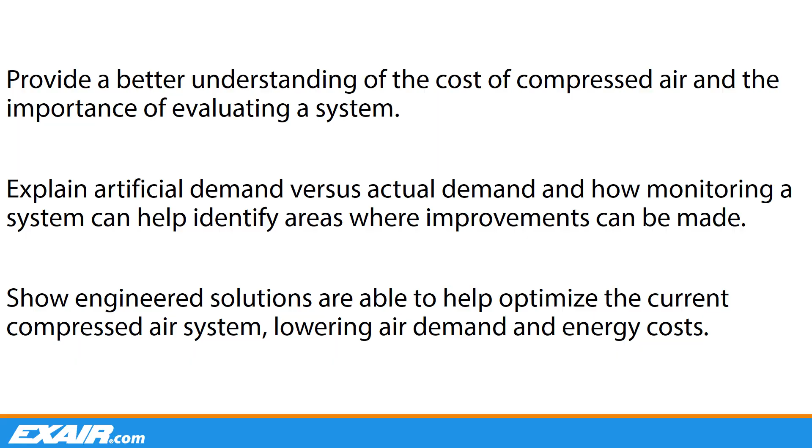From pneumatic hand tools like impact wrenches or nail guns to larger scale industrial applications like stamping presses, the use of compressed air can be found in almost any industry. It is often referred to as a fourth utility next to water, gas, and electric, and in many cases is the largest energy user in an industrial plant. The generation of compressed air accounts for approximately one third of all energy costs in an industrial facility, and up to 30% of that compressed air is wasted through inefficient operation and leaks.

In addition to simply wasting money, compressed air leaks can also contribute to a variety of other operating losses. A leak can cause a drop in system pressure, reducing the performance of end-use devices, which can have an adverse effect on production. A small leak may not be that noticeable, but several small leaks can lead to significant energy costs. With an average cost of 25 cents per 1,000 standard cubic feet, compressed air can be expensive to produce, so it is very important to use this utility as efficiently as possible.

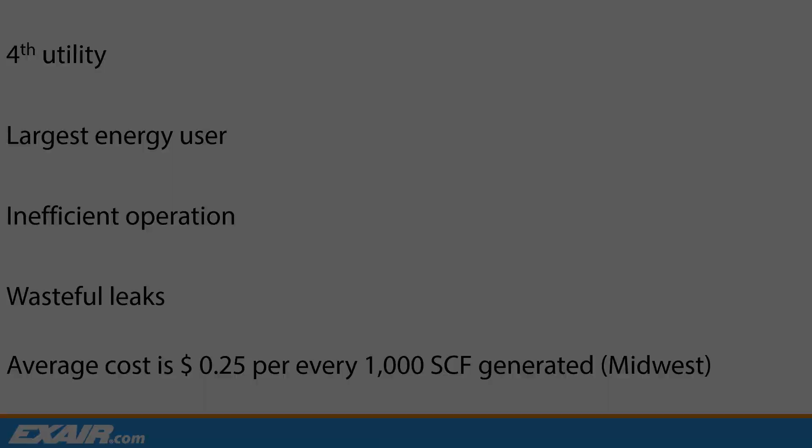Let's look at the cost of compressed air. Many plants know their energy cost, but if not, an industry average is 25 cents for every 1,000 standard cubic feet used. To get a better understanding of what this means, let's look at the following example. The cost will vary greatly across the country as utility rates change. If you know that your electricity rate is significantly higher than 8 cents per kilowatt hour, you should follow along with the slides and do your own calculation.

We start with a 20 horsepower compressor, which requires 15 kilowatts. At 8 cents per kilowatt hour, the 20 horsepower compressor costs $1.20 per hour to operate. If you have trouble calculating your usage, contact me or EXAIR after the webinar and we can run through the calculation.

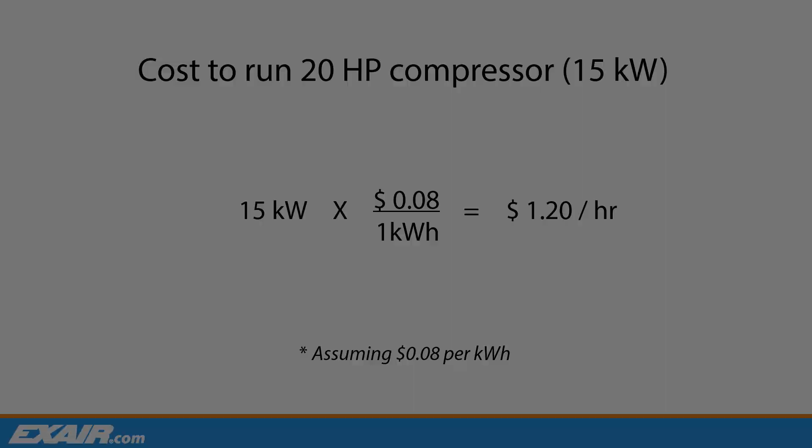A 20 horsepower compressor running at maximum output will produce 80 standard cubic feet per minute, or 4,800 standard cubic feet per hour. 4 SCFM per horsepower is a conservative rule of thumb. Some air compressors can make 5 or more SCFM per horsepower, but individual compressors and delivery rates may vary. To produce 1,000 SCF will take 0.2083 hours, or 12.5 minutes.

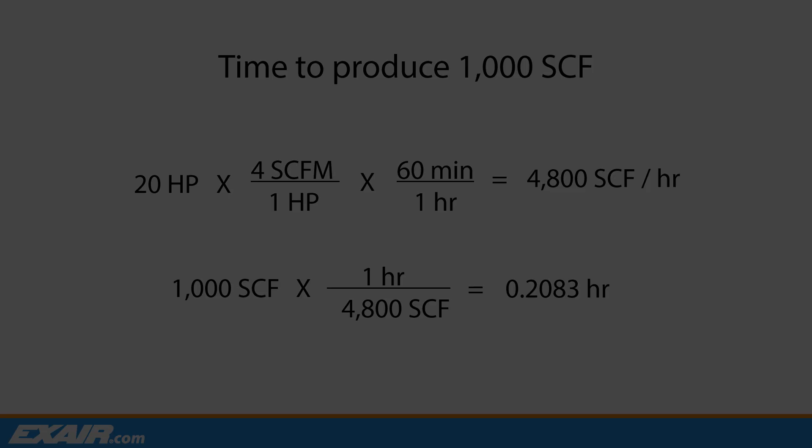Taking the cost of $1.20 per hour to run a 20 horsepower compressor times 0.2083 hours, the time it takes to produce 1,000 SCF, equals 25 cents for every 1,000 SCF generated. You will see this figure in most reference material as it's a very reasonable number in the Midwest, but is conservative in Europe and other parts of the country.

Let's talk about artificial demand. So what is it? According to the Compressed Air Challenge, it's the amount of excess air volume created by supplying higher than necessary line pressure for point-of-use compressed air applications. With fluctuating supply pressures, the artificial demand on the system varies, raising and lowering the amount of energy being lost to waste. A simpler explanation: plant personnel or operators increase the supply pressure in an effort to improve the end-use device's performance.

But when the pressure is maxed out and they can't increase it any higher, the line pressure will actually begin to drop, indicating potential leaks in the system. As a result, performance begins to deteriorate in certain areas. This not only puts stress on the existing compressor, now that it's having to operate longer, but it also leads to the false idea that a larger or secondary compressor is needed.

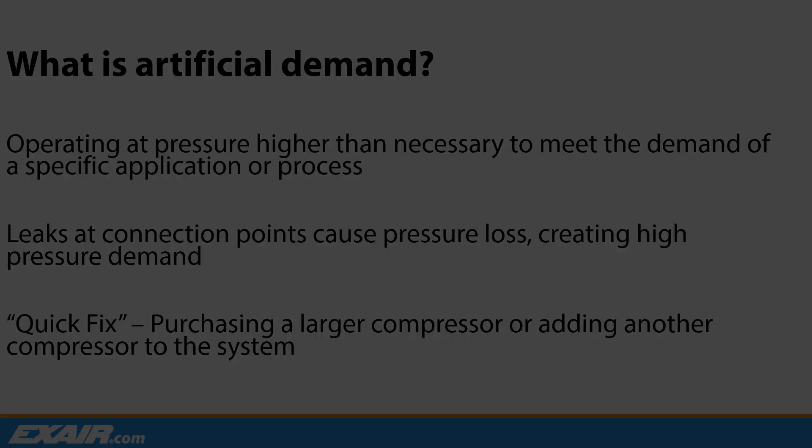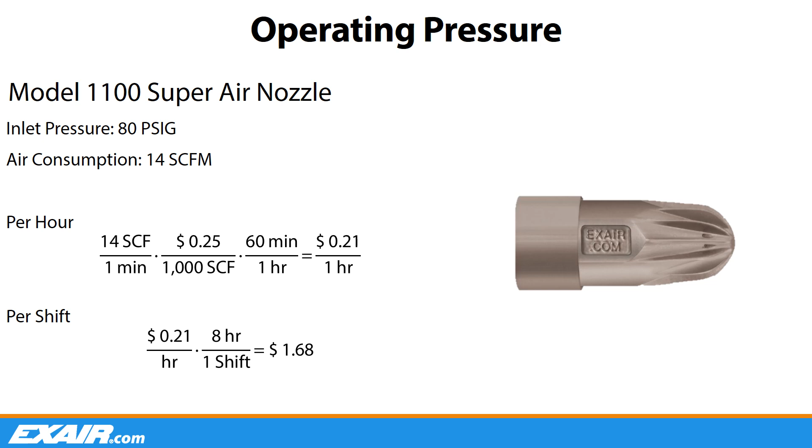Here's an example of how operating pressure can directly affect operating costs. We are showing our model 1100 Super Air Nozzle, which at 80 psig uses 14 standard cubic feet per minute. Based on the average operating cost of 25 cents per 1,000 SCF used, it would cost 21 cents per hour, or $1.68, to operate this nozzle for an 8-hour shift.

If we were to use the same model 1100 Super Air Nozzle but drop the operating pressure to 40 psig, the air demand would decrease to only 8.1 SCFM, reducing the hourly cost to 12 cents, or an 8-hour operating cost of 96 cents — a 72-cent reduction. This could lead to over $750 in savings annually.

Leaks in a compressed air system can waste thousands of dollars of electricity per year. In fact, in many plants, leakage can account for up to 30% of the total operational cost of the compressor. Some of the most common areas where you might find a leak would be at connection joints like valves, unions, couplings, fittings, etc. This not only wastes energy, but it can also cause the compressed air system to lose pressure, which reduces the end-use product's performance, like an air-operated actuator being unable to close a valve, for instance.

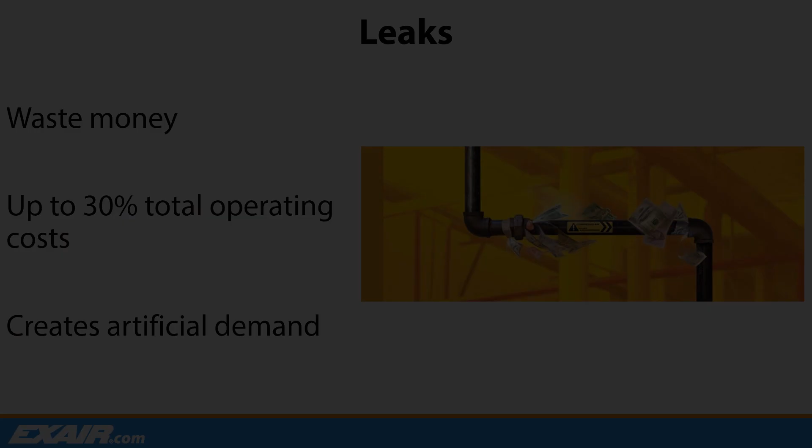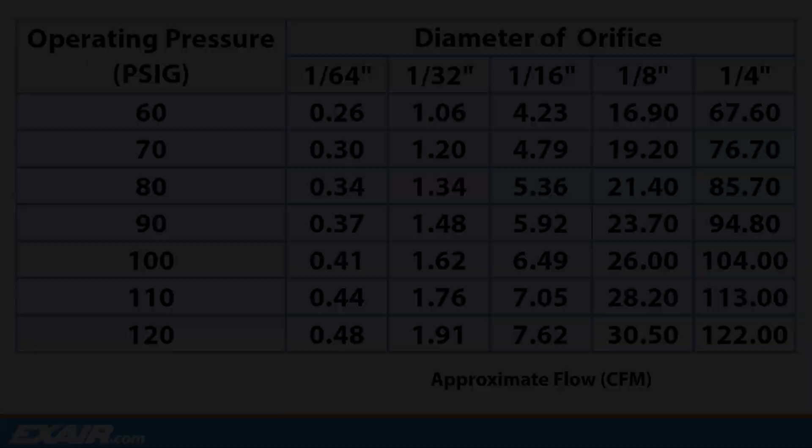One way to estimate how much leakage a system has is by using a downstream pressure gauge from a receiver tank. You would need to know the total volume in the system at this point to accurately estimate the leakage. As the compressor starts to cycle on, you want to allow the system to reach the nominal operating pressure for the process and record the length of time it takes for the pressure to drop to a lower level. The 1.25 multiplier corrects leakage to normal system pressure, allowing for reduced leakage with fallen system pressure. The industry average shows that with any leakage more than 10%, there are areas where improvements could be made in the system.

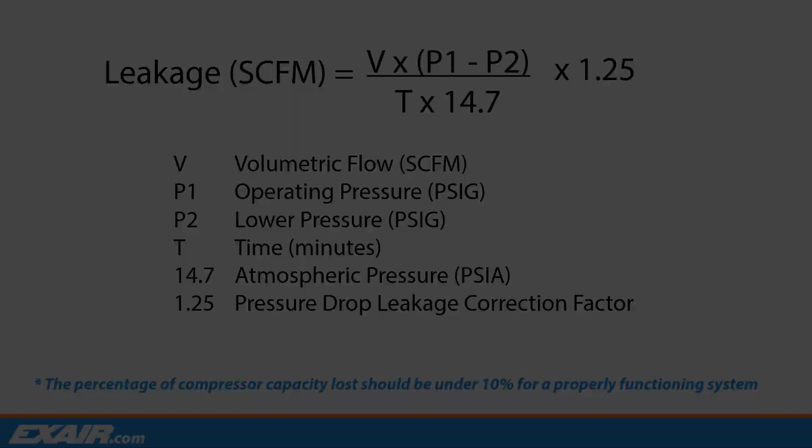If you don't know the volume of air that your compressor produces, another method to estimate how much leakage a system has is to turn off all of the point-of-use devices or pneumatic tools, then start the compressor to bring the system to normal operating conditions. Record the average time it takes for the compressor to cycle on and off as the pressure drops due to the lost air through the leaks. The total percentage of leakage can be calculated by taking the operating time divided by the total time and multiplying by 100. Again, any leakage more than 10% shows that improvements could be made in the system.

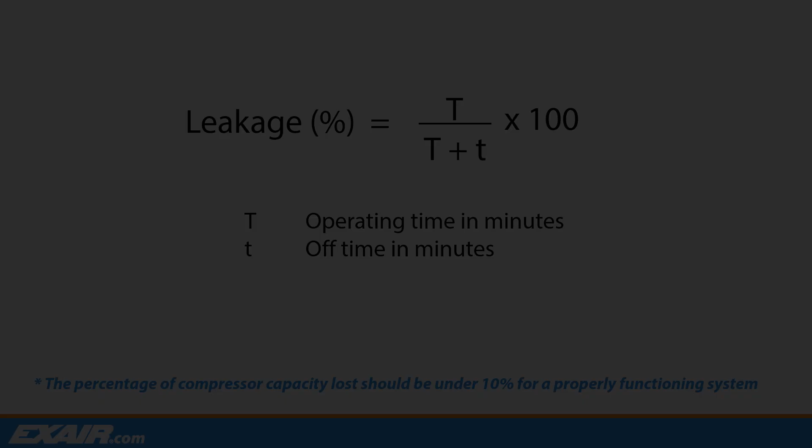Many times, plants will think just to add another compressor online to provide the additional capacity to maintain a constant workflow. While this may seem like a good idea at the time, you aren't addressing the real problem, such as leaks in wasteful end-use devices like open pipe. Not to mention that an industrial-sized air compressor is going to be a large capital investment with high installation and maintenance costs. Let's take a look at the following example.

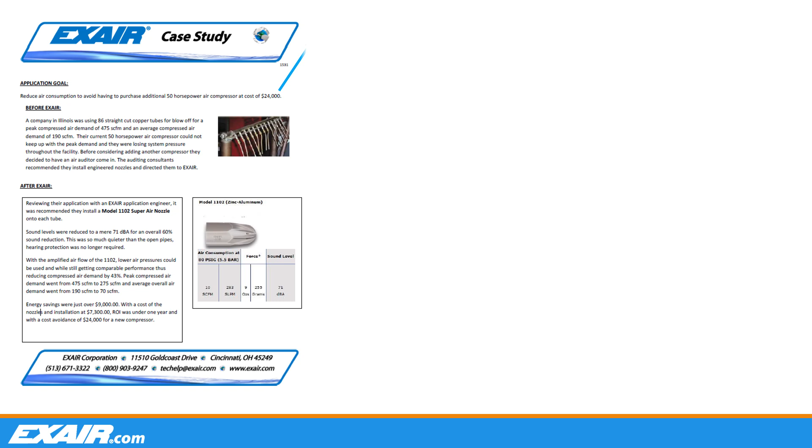In this case study, a customer was looking to reduce their air usage so they didn't have to purchase an additional compressor.

They were using 86 open copper tubes for general blow-off applications throughout their facility, with flows as high as 475 standard cubic feet a minute during peak operation and an average demand close to 190 SCFM. Their existing 50 horsepower compressor didn't produce enough volume to keep up with the full demand, which caused the system to lose pressure.

The company decided to have an air auditor evaluate the existing system, and after completing their inspection, instead of purchasing a new compressor, the consultant recommended installing an engineered solution to replace the wasteful open tube blow-offs.

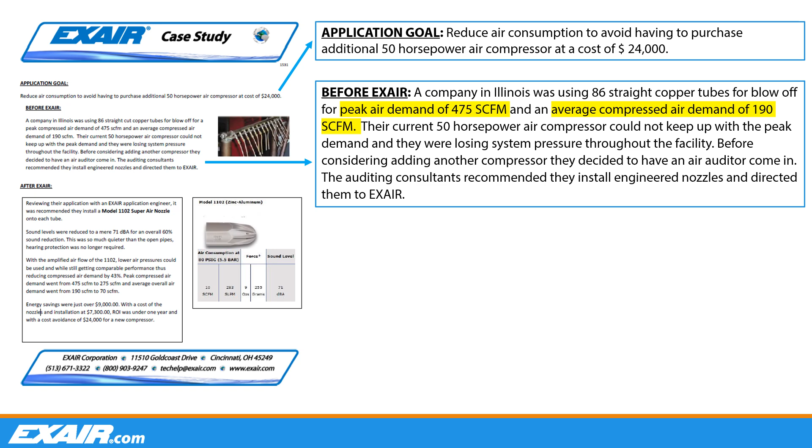By switching to an engineered solution, not only were they reducing their air usage, but they were able to operate at a lower pressure as well. By retrofitting an energy-efficient solution to each tube, they were able to reduce their air usage by 43%, using 275 standard cubic feet per minute during peak operation and only 70 SCFM for average use.

Not only did this save the company over $9,000 in operating costs, but by making the existing compressor operate more efficient, it eliminated the need for the additional 50 horsepower compressor, saving them an additional $24,000.

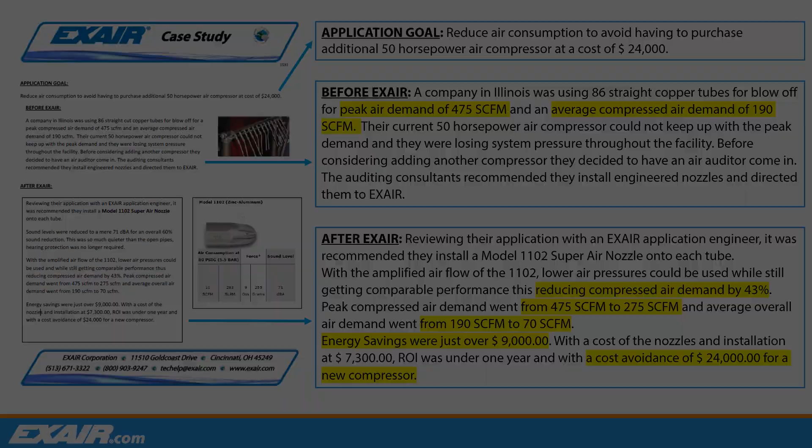Understanding your demand side will help figure out how much compressed air is currently asked for and why you are asking the supply side for that air. This will allow you to gather information on where the savings are possible in order to make educated adjustments within your compressed air system. You want to start documenting your demands, showing each point of compressed air use.

Start at your compressor and follow the compressed air lines to each drop that has a point of use, like an air gun or blow-off nozzle. Record the volume of air that each device is using at a given pressure and the length of time that it's being used, as well as the length of time that it's off.

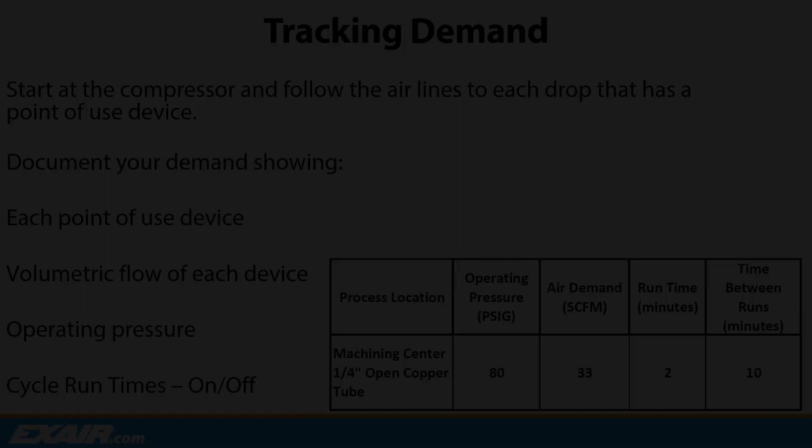Once you have all of the point of use devices recorded, you can then begin to look at the areas you have for improvement. For example, if you have several duplicate processes but only one location needs a higher operating pressure than others, that would be an ideal location to look at why you need the higher pressure.

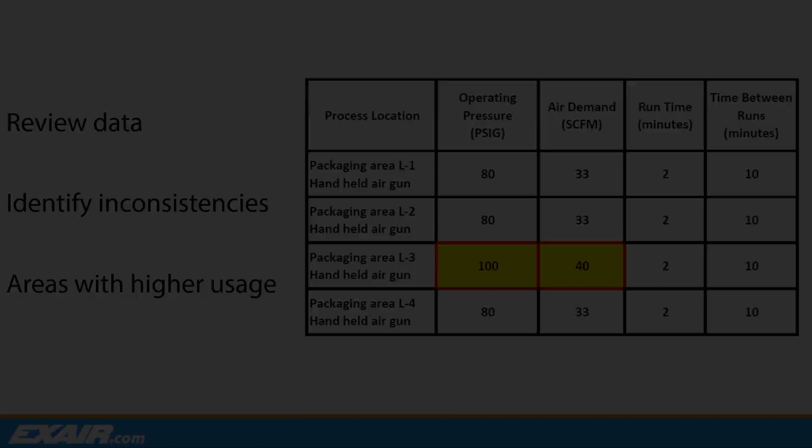Okay, that was a lot of information, so let's do a quick recap. We discussed how to calculate the cost of compressed air and explained how creating artificial demand can lead to expensive waste. We showed how monitoring the current system can help you identify improvement areas to reduce waste, leading to operational cost reduction and unnecessary capital expense.

Now let's take a look at how following just a few simple steps can help optimize the current system and reduce your compressed air usage.

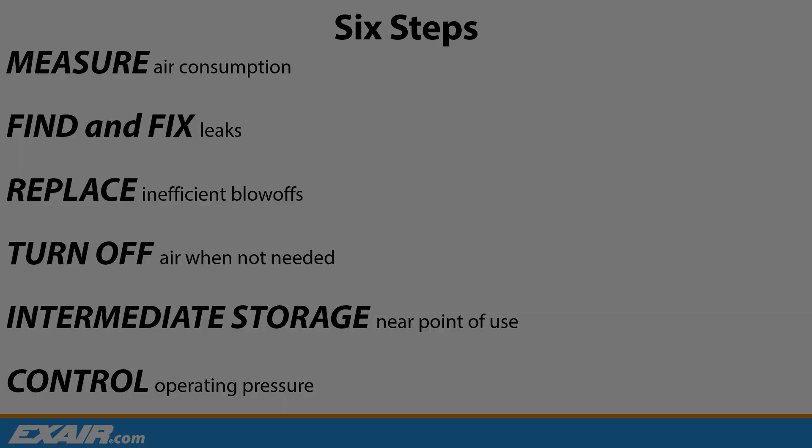As we mentioned earlier, the first step you want to consider is measuring the air usage in the system. If the demand exceeds the supply, there is potential for problems to arise, such as lowered pressure and force from compressed air operated devices leading to irregular performance.

To relate this to everyday situations, think of banking. Most people or businesses have systems in place to monitor their accounts, ensuring that there is always enough of a balance in their account to cover their expenses. The same principle would apply here.

By measuring your compressed air usage, you can locate the source of high usage areas. Monitor the usage on each leg of the system. Again, to do this, you want to start at the compressor and check individual leads to each drop point to a blow-off device. Record your findings to track the demand.

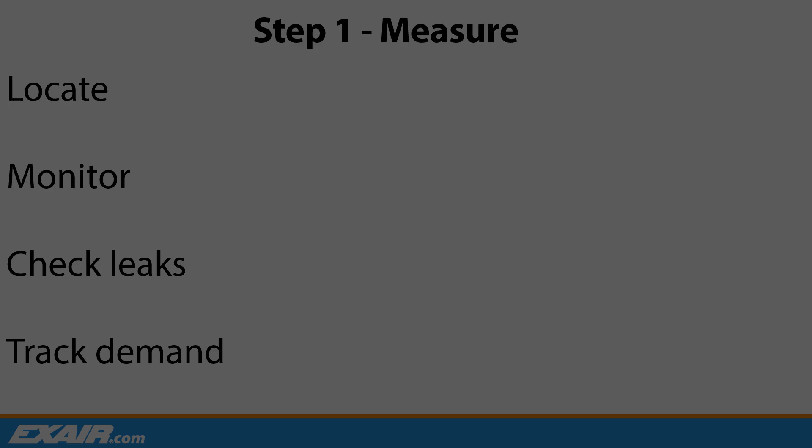EXAIR's digital flow meters are designed to measure flow continuously and accurately to give you real-time flow measurements of your compressed air system to help identify problems. You don't need to weld, cut, or disassemble pipelines to install. With a drill guide, the digital flow meter can be easily mounted onto the pipe. The digital flow meter measures flow by comparative analysis with thermal dispersion, so the accuracy is very high and recalibration is not required.

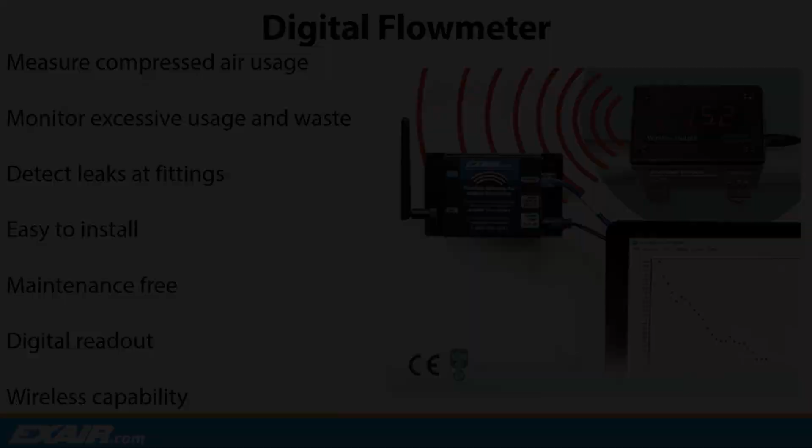Step 2 is to locate the source of waste. As discussed earlier, compressed air leaks can result in a waste of up to 30% of a facility's compressor output. A compressed air leak detection and repair program can save a facility this wasted air. Implementing such a program can help a facility find additional air compressor capacity for new projects instead of having to purchase additional compressors to make up for the leakage.

Whenever a leak occurs, it will generate an ultrasonic noise. Ultrasonic sound is a range of sound that is above the human hearing capacity. Typically, humans can hear frequencies from 20 Hz to 20 kHz, with sound from 20 kHz to 100 kHz being termed ultrasonic.

Turbulence created by air or a gas forced through a small orifice generates ultrasonic sound. Ultrasonic sound is very directional in nature. This directionality is used to pinpoint the exact origin of the sound source, the leak point.

The greater the pressure difference across an opening, the greater the velocity. As the velocity increases, the frequency of the emitted ultrasonic sound will become higher, producing white noise, or the broadband emission of sound.

Our ultrasonic leak detector is designed to locate the source of ultrasonic sound emissions up to 20 feet away. These ultrasonic sound emissions are converted to a range that can be heard by humans. The sound is 32 times lower in frequency than the sound being received, making the inaudible leaks audible through the included headphones, and the LED display gives a visual representation of the leak.

Many open pipes or homemade blow-offs not only waste compressed air, but can also be dangerous to operate, as they typically violate OSHA safety standards by generating loud noise. The third step involves finding the source of these noisy and wasteful blow-offs and replacing them with an energy-efficient engineered solution. By replacing these devices, you are not only reducing the amount of waste, but also improving operator safety by complying with OSHA safety requirements, avoiding potential costly fines.

For comparison, let's look at a 1/4-inch open copper tube. A 1/4-inch open copper tube, when operated at 80 psig, will consume 33 standard cubic feet per minute. This adds up to roughly $3.96 per 8-hour shift.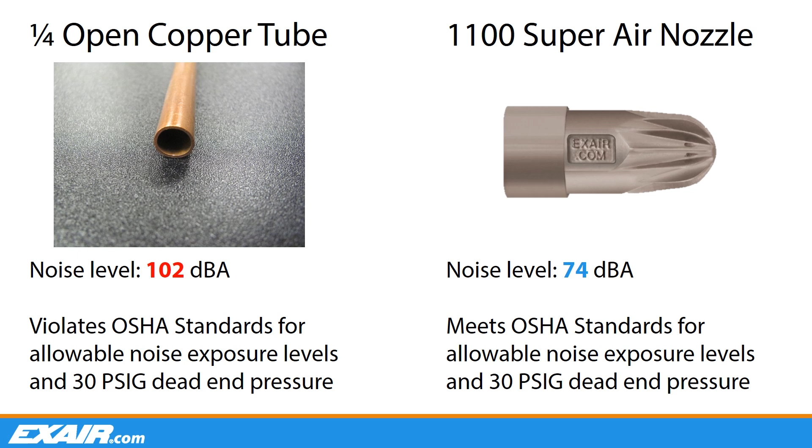In addition, the open copper tube provides no relief or control to reduce the outlet pressure below 30 psi if the device were to be blocked by the skin, therefore not meeting OSHA standard 29 CFR 1910.242B. With our Model 1100, the sound level is only 74 decibels, well within the OSHA standard. And the air is exhausted below an array of fins, so it is always able to vent freely, never getting above 30 psi if dead-ended.

Here we show another case study we recently published. In this example, the customer was looking for a replacement blow-off device that would reduce air consumption and the noise level to meet OSHA standards.

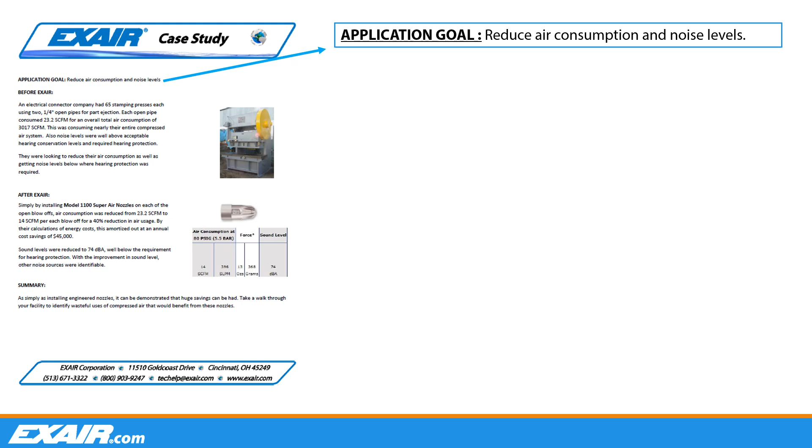The company had 65 stamping presses, each fitted with 2 1/4-inch open pipes for part ejection. Each pipe consumed 23.2 standard cubic feet per minute, for a total air demand of 3,017 SCFM, using almost their entire compressed air output capacity. The existing blow-offs produced noise levels well above acceptable hearing levels per OSHA requirements, which required hearing protection for the operators.

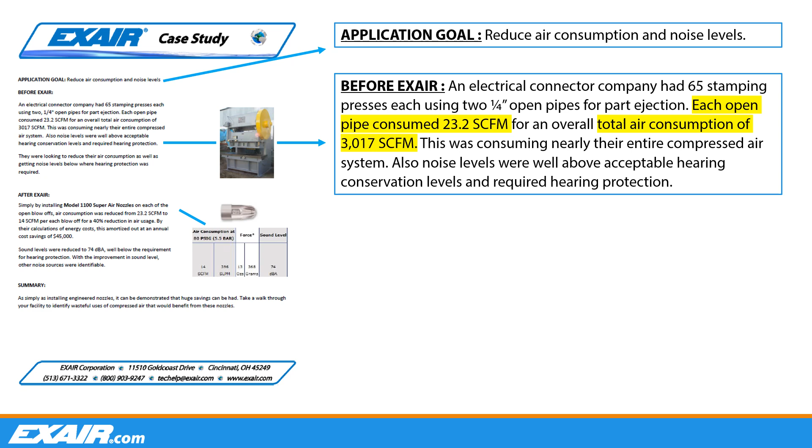By installing our Model 1100 Super Air Nozzles on each existing noisy open pipe blow-off, the air consumption was reduced from 23.2 SCFM to only 14 SCFM, for a 40% total reduction in air demand. This calculated out to an estimated $45,000 of energy savings per year. In addition, the sound levels were reduced to 74 dBA, meeting OSHA requirements and eliminating the need for additional hearing protection. Not to mention, they were able to identify other loud noise sources as well.

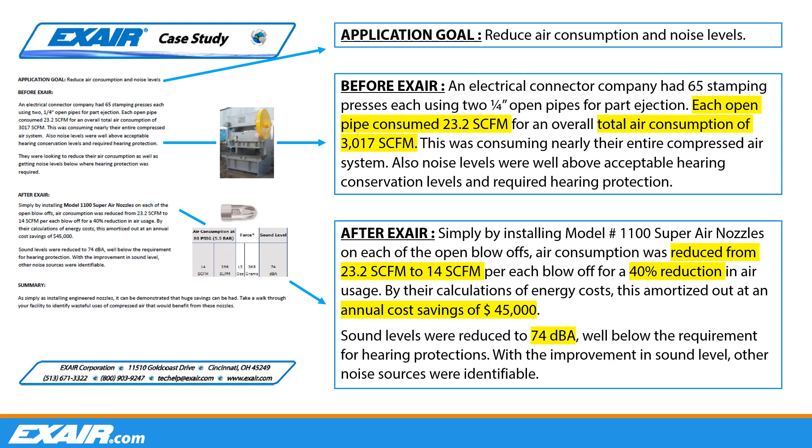EXAIR's digital sound level meter is an easy-to-use instrument that measures and monitors sound level pressure in a wide variety of industrial environments. The source of loud noises can be quickly identified so that corrective measures can be taken to keep sound levels at or below OSHA maximum allowable exposure limits. The sound meter comes from the factory with NIST certification.

The easiest way to reduce compressed air usage and save on operating expense is to turn off the compressed air to a device when it isn't needed, step 4 in the process. Not only will this save money, in many cases, it can also simplify a process for the operator.

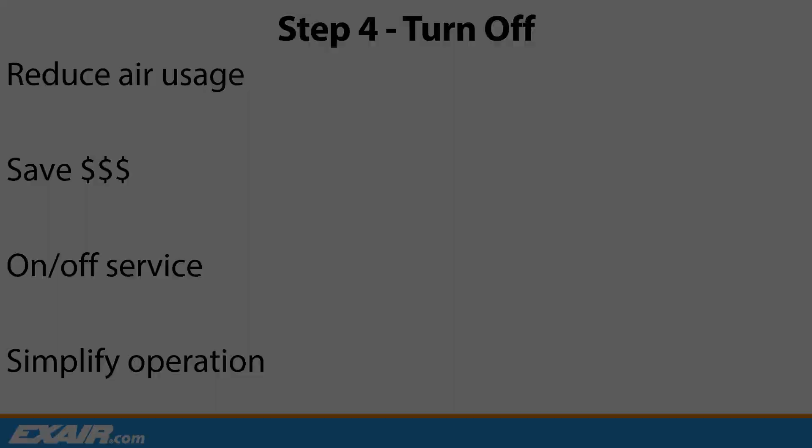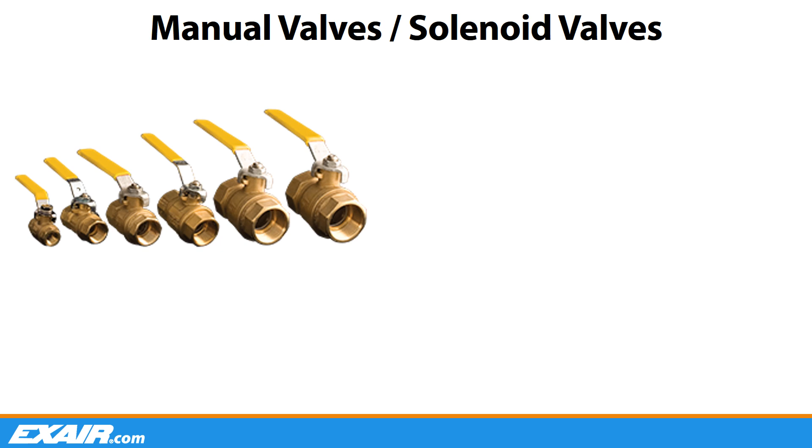A simple manual ball valve and a responsible operator can provide savings at every opportunity to shut down the airflow. For automated solutions, a solenoid valve can be operated from a machine's control. For example, if the machine is off or a conveyor is stopped, close the solenoid valve and save the air. A foot pedal valve offers a hands-free solution to activate an air-operated device only when needed, such as being implemented in an operator's workstation.

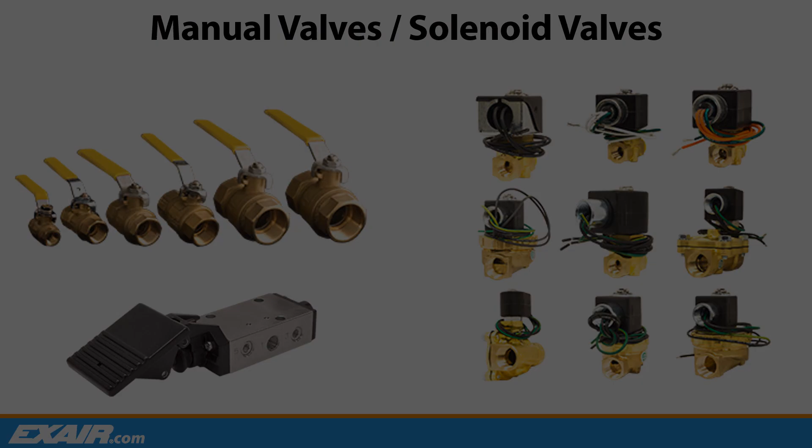For even more control, you can use a device like our electronic flow control, or EFC. This helps minimize compressed air usage by incorporating a programmable timing-controlled photoelectric sensor to turn off the compressed air supply when there are no parts present. It is suited for NEMA 4 environments and can be easily wired for 100 to 240 VAC.

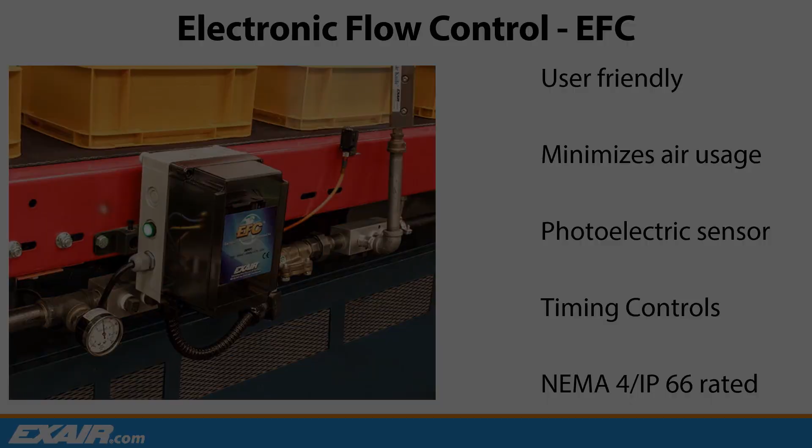Step 5, intermediate storage. Some applications require an intermittent demand for a high volume of compressed air. This can cause fluctuations in pressure and volume throughout the system, starving certain areas of compressed air. A common mistake is to increase the pressure at the compressor. This doesn't solve the problem, it only masks it. In some cases, you are actually causing more waste. Remember artificial demand we talked about earlier? Increasing system pressure by 10 psi results in a 5% increase in energy cost on average.

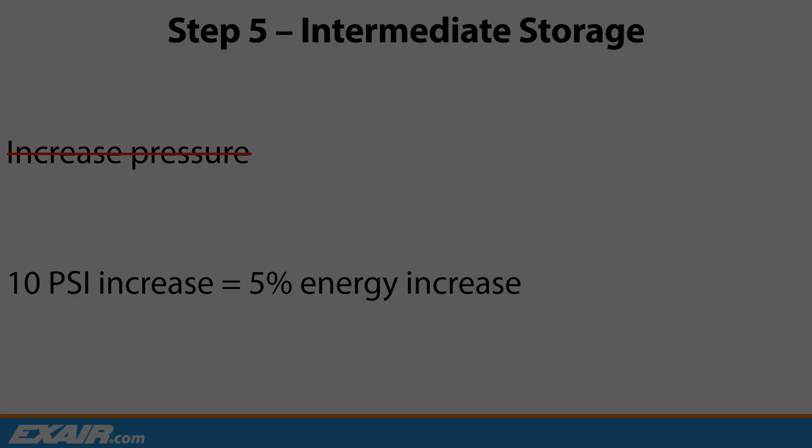By installing a receiver tank near the point of high demand, there is an additional supply of compressed air available for a short duration. This will help eliminate fluctuations in pressure and volume. EXAIR offers a 60-gallon ASME-approved vertical steel tank with mounting feet for easy installation near high-demand processes.

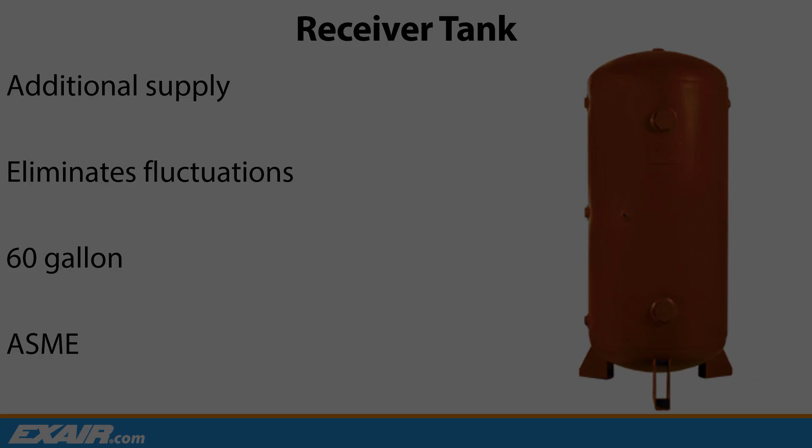Step 6, controlling operating pressure. Many pneumatic product manufacturers have a certain set of specifications regarding performance at stated input pressure. In many applications, or in the case of using a homemade blow-off device like open pipe, these wouldn't necessarily require

the full rated performance of the device or full line pressure. Controlling the air pressure at the point of use device will help to minimize air consumption and waste. After all, the more pressure you put into an orifice, the greater the volume of air that will pass through it.

By simply installing a pressure regulator on the supply side, you can start off at a low pressure setting and increase the pressure until the desired result is achieved. Not only will this help to conserve energy by only using the amount of air required for the application, it also allows you to fine-tune the performance of the point of use device to match the application requirements.

We understand that not all companies or facilities have the resources available to perform the steps we discussed. EXAIR offers a free service where you can send us a sample of the product or products you use for your applications, and using our calibrated testing equipment, we can compare the performance of your existing product to an EXAIR engineered solution.

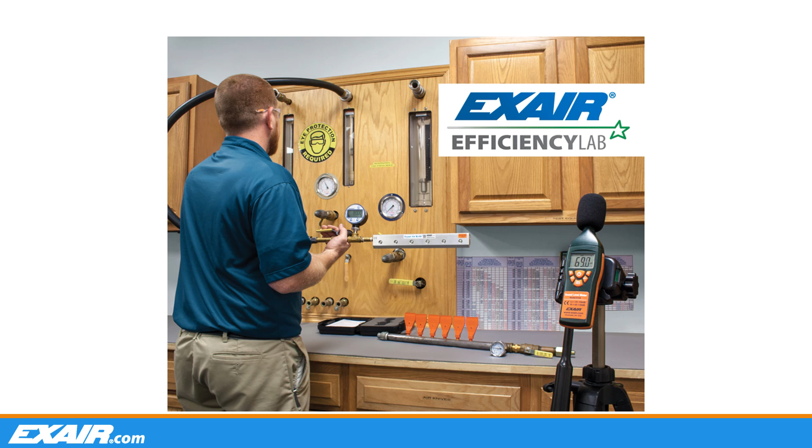During our testing, we can determine air consumption, noise level and force, and publish a comprehensive report, including a cost savings analysis.

Here's an example of a recently published efficiency lab report. We will provide the objective of the test, the current application or process, and the procedure we follow to perform the testing. We will show the performance test results for the existing product compared to the performance specs of the recommended EXAIR engineered solution. In conclusion, we will provide a summary of our findings as well as a recommendation for optimizing the current process.

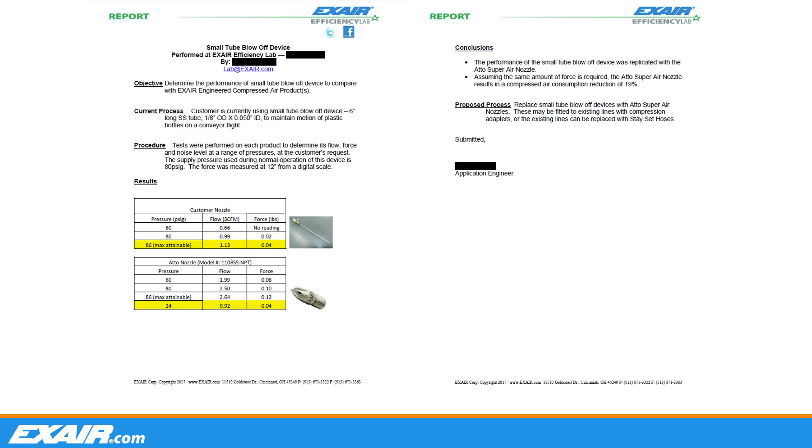One of the first questions is, I am using an open copper tube. How would I adapt one of your nozzles? The easiest way would be to use a compression fitting to an MPT adapter.

Next, how would a clogged filter affect performance? We recommend checking the pressure drop across filters once you see more than a 5 psi drop. That is when performance could be negatively affected.

How would I take advantage of your efficiency lab? You can contact an application engineer and we will make arrangements so you can send a sample of your product in for performance testing.

Another one comes in, the impact is important. I think what you're saying here is how the air contacts the part. Yes, distance, pressure, angle, all are going to come into play for effective blow off. That's something you're going to need to adjust to fit the application, but those are going to be important.

Does the tool you show calculate the savings value of the leak? The ultrasonic leak detector has no storage. It's just going to indicate the approximate amplitude of an ultrasonic sound wave.